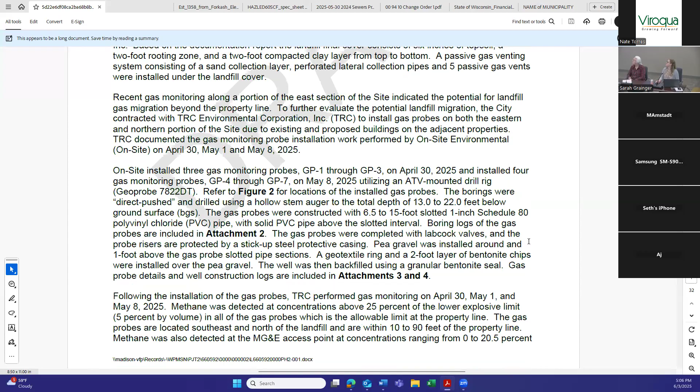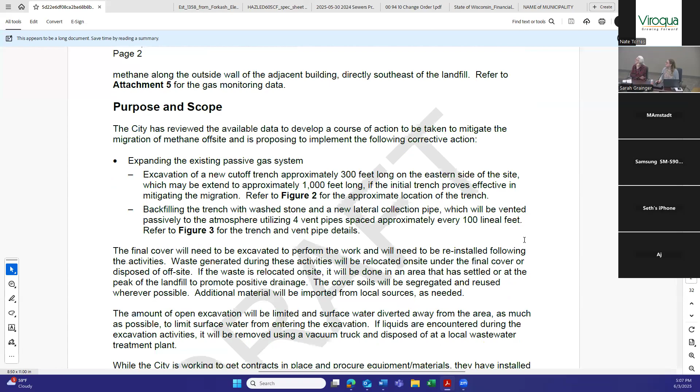If everything's acceptable to the DNR, implementation needs to be done by the 30th of June. So right now I have to work out with the DNR what they are calling implementation.

What this is calling for is: the landfill currently has a passive gas system which consists of pipes buried below the final cover. There's a final cover made of clay that impedes the flow of water into the landfill and impedes the flow of gases vertically out of the landfill. Underneath that final cover, there is a passive gas venting system that consists of pipes and trenches, and they connect to 5 existing goosenecks out there to vent to the atmosphere.

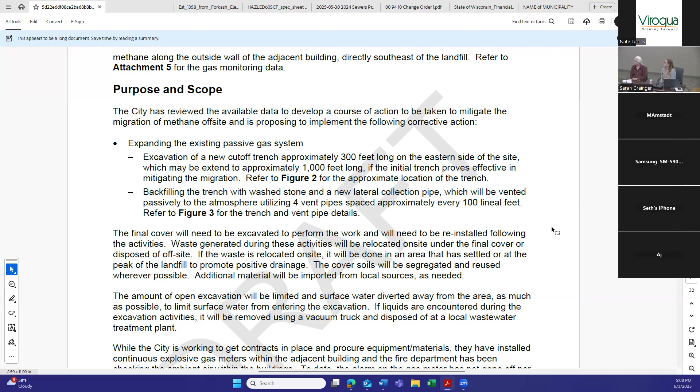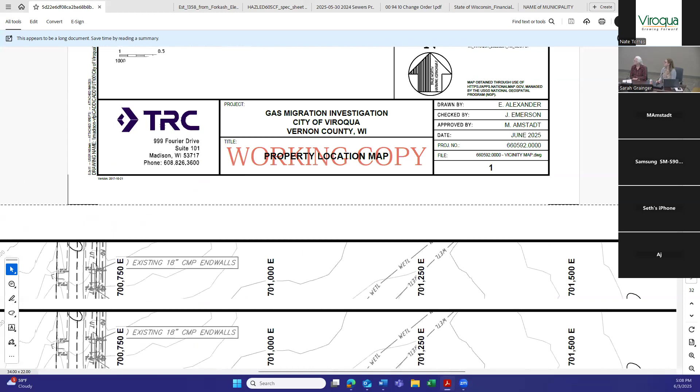That system may be working a little bit, somewhat, but it's not controlling the gas from getting off site. So what we are proposing to do is put in additional piping underneath the cover with additional goosenecks. The way I've got this written up is we will do approximately a 300-foot trench on the east side near the church building. That 300-foot trench will have an aggregate trench and a pipe connected to 4 goosenecks.

And we will monitor gas probes 1, 3, and 2 to see if the gas that we were seeing in those probes starts to go down or is eliminated completely. The goal is for those to be showing 20% oxygen and no methane—basically ambient air.

If that 300-foot section works, we will expand it to approximately the whole 1,000 feet, because we also have migration along the north at gas probes GP 4 through 7.

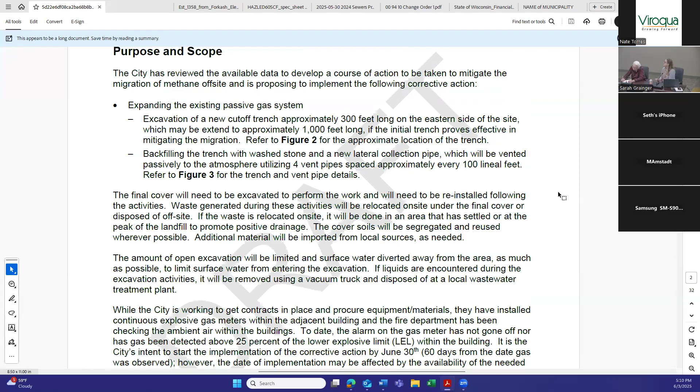So what we're proposing to the DNR is to put 300 feet of trench in and monitor gas probes 1, 2, and 3 weekly for up to a month, and then depending on those readings, construct the additional 700 feet.

I am not 100% sure that they're going to agree with this approach. They may want the whole 1,000 feet, but I don't want to construct 1,000 feet of something if it's not going to work. In my opinion, this is the best course of action for the city to take at this point in time.

We've looked at other possibilities, things like whirlybirds that you can get from Menards or Home Depot that you put on the existing gas vents out there—something you might see on top of a roof line that would just pull a little more vacuum out of the 5 existing vents, but that's not going to be enough.

We looked at installing small blowers on the existing gas vents. That is not going to pull enough vacuum. You could put an active blower, like a vacuum cleaner, but it needs to be intrinsically safe, so it's not just your typical vacuum cleaner or shop vac that we could retrofit to work.

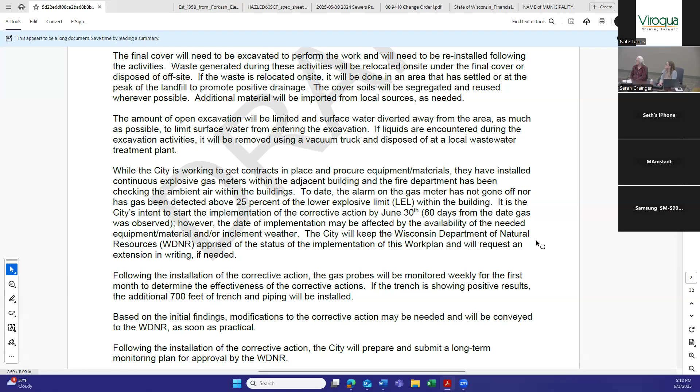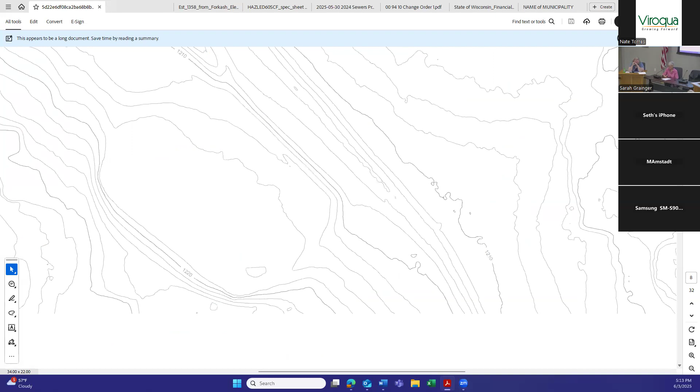Seth, it's hard for you to visualize it, I imagine. Well, I was visualizing, but I appreciate the explanation of it, Mike. I like the idea of basically a test trench first.

Yeah, I think it makes a lot of sense, even just from a construction perspective, to know that what we're expecting to see, how we're expecting to do it, is actually what's happening out there, because there's still a lot of variables.

We talked with Badger, who's working locally, about if they do the 300 feet and have to come back in a couple of weeks, how much the mobe, demobe would cost. They threw out a number of about $500 per piece of equipment. So if it's a backhoe, a dozer, a dump truck, maybe $1,500 on a project that's going to cost hundreds of thousands of dollars if we do the whole 1,000 feet.

And if we do the whole 1,000 feet and spend hundreds of thousands of dollars and it doesn't work, that's not the time to find out. I'd rather find out by doing about 300 feet first.

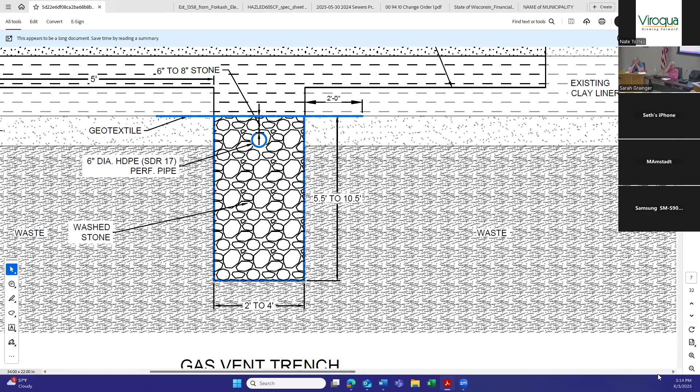How deep's it got to be? We asked for two different quotes, one for going about 10 feet deep. The final cover is 5 feet, using round numbers, so going 5 feet into the waste. And then the second option I asked for is going 10 feet into the waste. So we did get costs, and on here it says 5.5 to 10.5.

We got costs, and they're revising their numbers because their initial numbers were based off of hypotheticals, this is what we're going to do, and so on. They had to put their numbers together very quickly, and now they're sharpening their pencil, now that they have pictures in front of them and can see what we're proposing to do.

Who's 'they' that's sharpening their pencils? Badger, okay. I'm not sure if it's Badger Construction or Badger Excavating. Actually, Badger Environmental. Okay, Badger Environmental.

Yeah, this is sort of the result of the process, right? We moved into it really quickly because we wanted to get a handle on what we were talking about. It's hard when a contractor gets something somewhat vague and they don't know all the parts, which again was because TRC was moving so quickly, trying to get numbers before they had the image and the drawings to send them. Then we had a conversation about the things that were more challenging for Badger, like how they would go about the excavation and move the trench boxes. I think it was a really good meeting to help everybody get on the same page and figure out how to do it most effectively.

So to answer the original question, how deep are we going? Until we start digging, I am not sure how deep. We're going to try and go as shallow as possible.

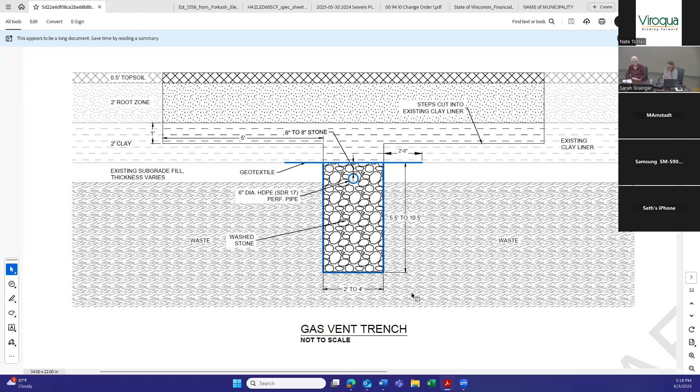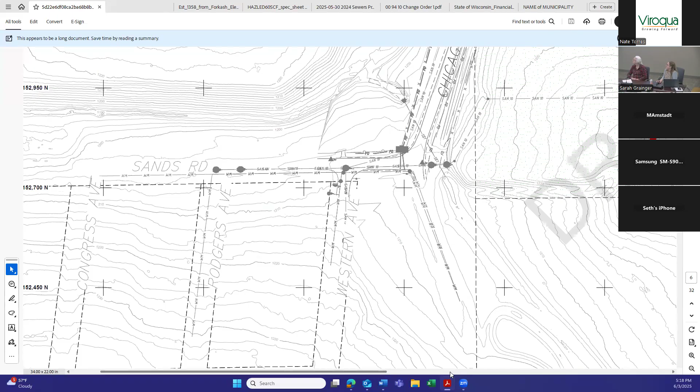Sarah, if you go to where the red line is showing the trench, you can scoot it over. So right next to that, there's kind of a bullseye, and right in the middle of that bullseye there is a passive vent that should be allowing this gas to get out, and for some reason it's just not doing its job.

I did not show it on here, and I did not mention it in the work plan that we were going to try and tie into that or investigate over there, because I didn't want the city to be committed to any more than it has to be.

But going to that passive vent that is there, which will be another maybe 30 feet to dig down in that area, we'll try and find out why the existing system possibly isn't working. It could be as simple as it being bedded in a very dirty sand, which was common back in the day, because when the rules came out they just said you had to put it in sand. So a lot of people used a silty sand that's dirty and doesn't really allow much movement of air through it. It's not porous, whereas our trench should be very porous.

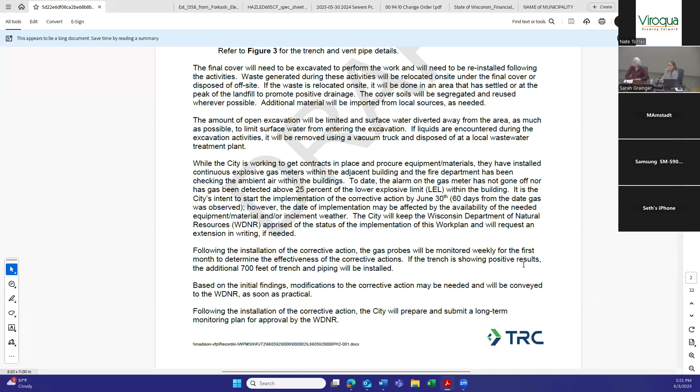The DNR may not be interested in us doing it phased. So you're going to try that? We're proposing it. We have brought it up to them, but the area we're looking at doing is this area, right here, because this is the church.

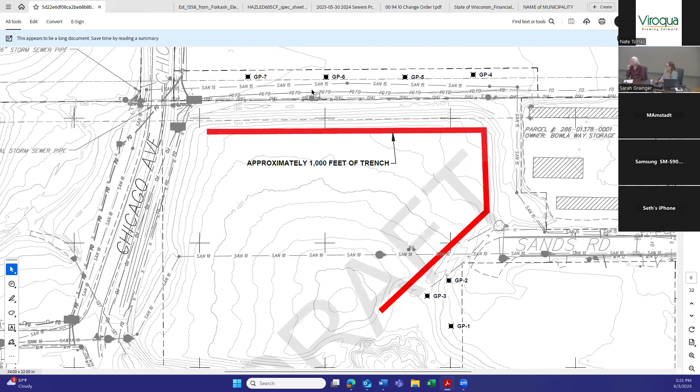So the north side we did because we know there's going to be development, but there's nobody living here, there's no buildings right there, it's quite far away to other buildings. But this area is a more active area, and so this would be our primary location to remedy first. It's accessible and it just seems like a real good place to start.

So that's the idea, that if they'll allow us to just do a section of it, see that it's successful or whatever we find out. Again, we're learning things constantly, and opening it up and digging in will tell us more about what's happening specifically there, but hopefully we can get a better understanding of the landfill.

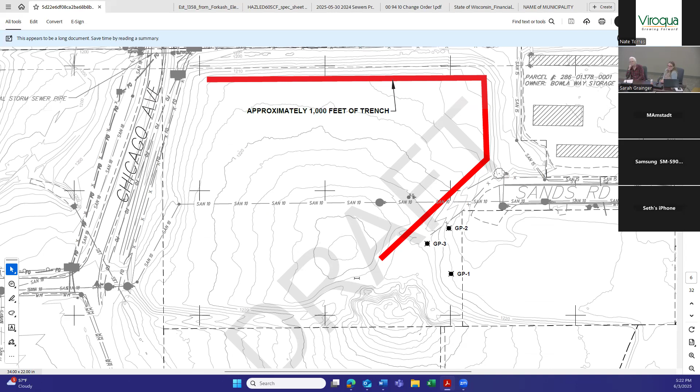AJ: If we go with this plan and the deadline being Friday for the DNR, and they say we can't do 300 feet, do we just default to doing the 1,000, or how do we handle that? Well, I guess we'll have to react to whatever they throw at us.

And then this is the work plan, and the idea was that we would take the proposal, like the proposed contract, and take that to council and get it approved. So there's going to be another step regardless after we go through this. But I guess it kind of depends on what they tell us, which I'm assuming is do all of it, but we don't know that. The one thing is, the DNR may say, do it all.

Once we start digging, we may find something we weren't expecting that changes everything I'm proposing right now. That could end up being a phone call to Colin Maas at the DNR saying, things aren't like we thought, what we were proposing isn't going to work, and I'll send an addendum. So I'm trying to keep it as generic as possible, allowing us to put a backhoe or excavator into the ground and see what we have.

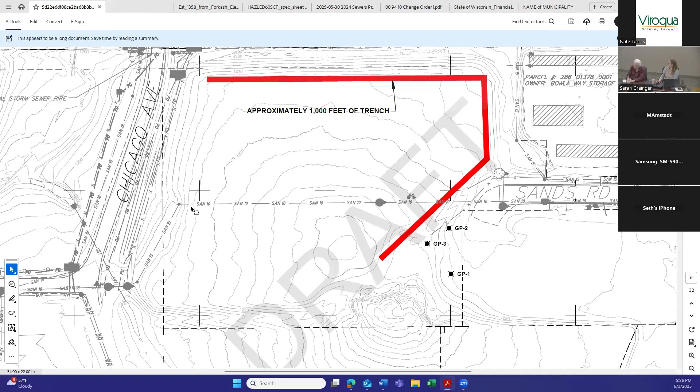We're looking for a motion. I make a motion to approve the landfill gas remediation work plan as presented. This is Crystal, I'll second. Motion and a second — any further discussion? Do we need any more explanation than that, Lori? This is not money at this time. Roll call — all in favor signify by saying aye. Aye, aye, aye. There's nobody else left, so motion carries.

Thank you, Mike. Okay, Sarah, I'm going to drop off, but if you need me I've got my phone right next to me and can get back on. Thank you, Mike, I appreciate that. Or do you just want me to have you guys on in the background? I can do that too. No, we should be done. Okay. Thank you, everybody have a great day. You too, Mike, thank you.

Thanks, Mike. Okay, approval of the Forkash Electric proposal for lighting at the wastewater treatment facility.

This is the second proposal we've seen from Forkash — we're keeping them busy in the lighting section. Can we say why we need to do this?

Explosion-proof light fixtures — this is for the wastewater treatment plant, in our treatment domes. They're covered and let in a little bit of light, but obviously we need light all day and night when we need it. The ones we have right now, four in total, are not working anymore, and you can't just put a new light bulb in because they're explosion-proof fixtures. So this proposal is for installation and supply of four of the fixtures.

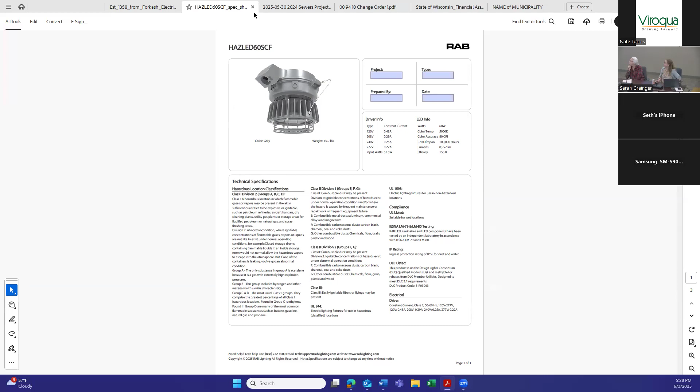And they look like this right here. They'll basically install them in the domes to make sure we have proper lighting that's up to code. Do they have cameras on them, or does it just look that way? I think that's just the way it's attached to a pole, that kind of thing.

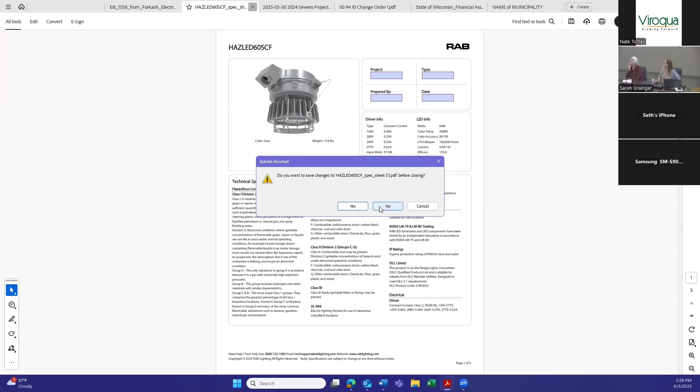So I'm looking for approval to install those lights. We're doing explosion-proof ones because we have to, I assume. Yeah, or we just like to spend money.

It's corrosive, and potentially, at the wastewater plant there are different classifications of explosion proofing depending on the room. The primary buildings are probably the most concerning, but any really closed building can build up gas when it's exposed. I don't know if everybody came to the tour way back when, we should do one again soon, but it's that covered dome where you have all the open process basins.

Okay, looking for a motion to approve. This is AJ, I make a motion to approve the Forkash Electric proposal for lighting at the wastewater treatment facility for $3,772. Okay, motion by AJ.

Do we have a second? Todd will second it. Second by Todd. Any further discussion? Roll call, please.

Seth, aye. Todd, aye. Andrew, aye. Crystal, aye. And Cindy, aye. Motion carries. Discussion and approval of financial assistance agreement for lead service line grant.

Cheryl: Okay, so I didn't know how much you wanted, sorry Cheryl, but I have both of those documents in case you need them. Okay, I don't think so. It's a fairly simple financial agreement.

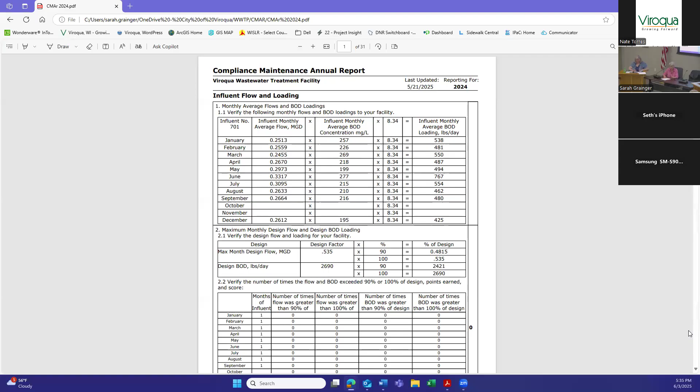Review and approval of the 2024 Compliance Maintenance Annual Report, CMAR, and the resolution. All right, it's everybody's favorite time of year.

I know, but you are on the hook for this. So it is important that even once a year you see what you have to be responsible for. I'll go in more detail today as necessary, but I'll try to abbreviate it for council. Still, all council members are responsible to understand what's in this document.

Pardon? Well, that's what the resolution says, that you review and accept it, and I was literally told by the DNR that this is for the board. This is so the board knows what's going on and makes sure all of these things are understood. Is there a test? Yeah. Let's hope they don't ever get to that point. We're in trouble. Right, okay.

Can I ask, do you just get to plug in some numbers and the report fills itself out? You don't have to. It's mostly populated through our submissions throughout the year. Then there's stuff that we do fill out, but like all of this flow information, Brock doesn't have to put this in new, it just pops itself. I wonder if in the old days they had to do it. Oh, I'm sure they did. I don't know when CMAR started, but we've done them ever since I've been here.

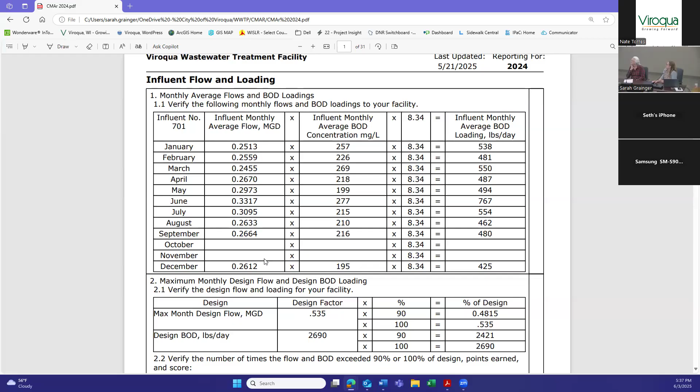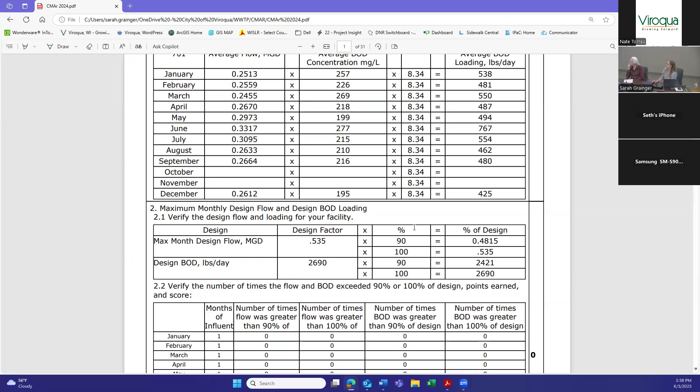So our flow rates that we're looking for, and it says, okay, this is our design factor. We're at 0.535, and this is at differing averages. We'll have our averages down here, but 90% flow and our 100% flow rate. So we're doing really well, we're not hitting too much flow coming into the system.

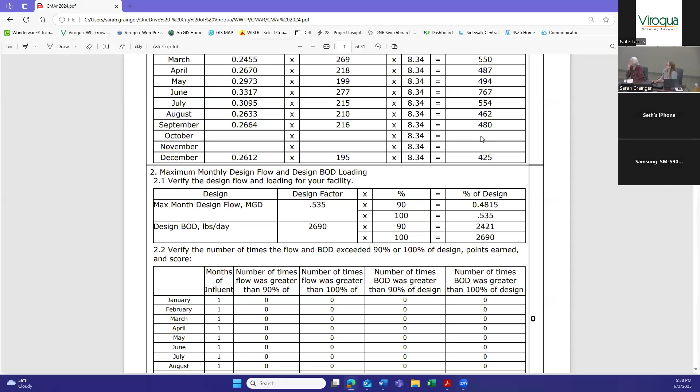And then the same thing for our BOD, our biochemical oxygen demand. It's our general parameter, it says can you handle how strong the waste is compared to everything that comes in. Again, we are doing well in both of those, we're not exceeding the amounts we're supposed to. We always do pretty well on our BOD loadings. Here, I think the maximum was like 767.

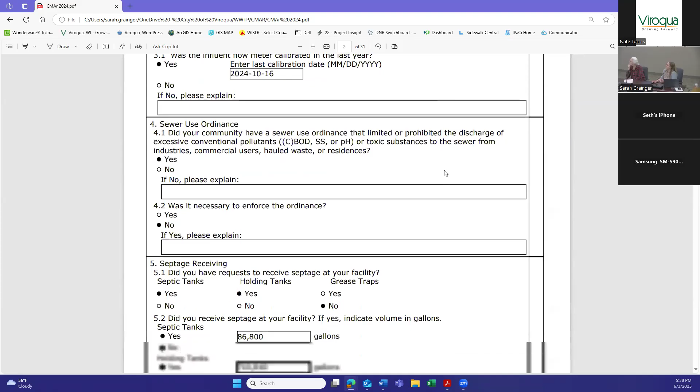Okay, flow meters. We talk about our influent flow meters and when they were calibrated. We have a sewer use ordinance that prohibits excessive pollutants in our system. Yep, we got all that taken care of.

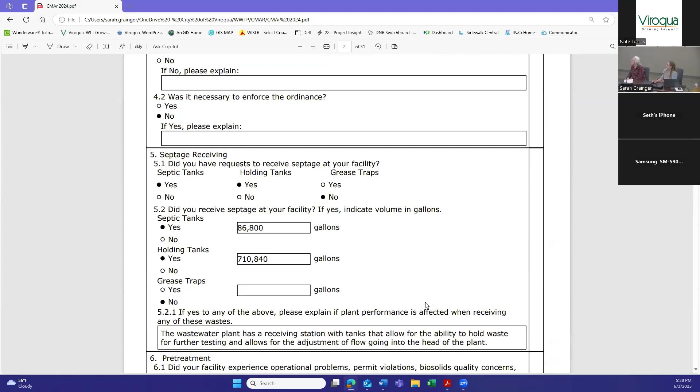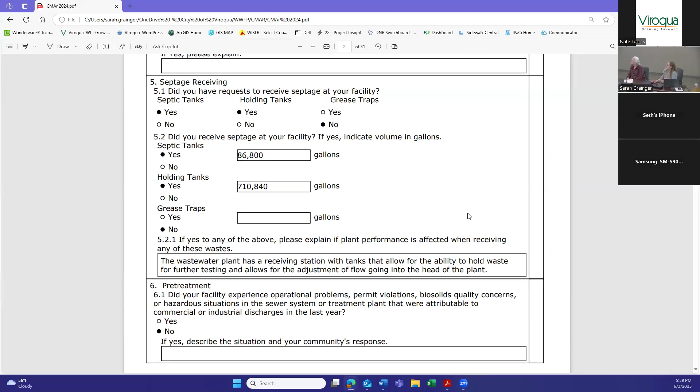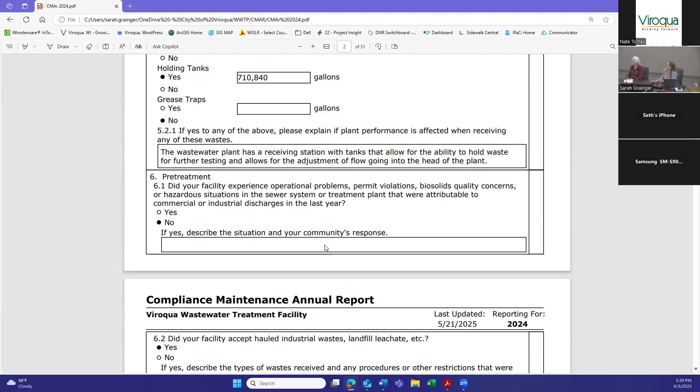Septage receiving, basically this is our hauled waste, so how much we get from septic tanks, how much from holding tanks, just slightly different forms. We set up that station essentially to bring the waste in and be able to hold it and have a little more control. That's been really great to use. We don't have any facilities doing pre-treatment. We had 2 loads of leachate, and that was just because they were in a bad spot, which we always try to help them with when we can, but we don't like to do it all the time.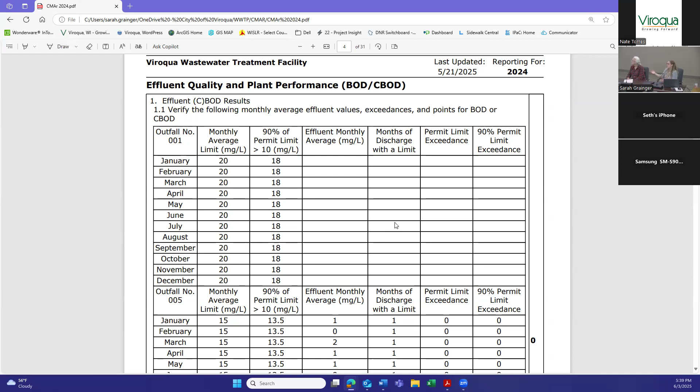And then our effluent, that's what's coming out of the plant. This is what we would be having our limits on, right? So it's like they don't really care what comes in, they care what comes out.

And so we always have two sets of information, which is always confusing because we have two outfalls. We have the outfall that's at the wastewater plant, that was the original outfall, but then we also put the outfall in down by Springville. And so this is why we have two, but we don't have any data for one because that meant we weren't exceeding capacity or having some sort of upset that we needed to use the second backup outfall.

And so we ended up with our different averages for all our parameters. This one here is our BOD results. So again, that's kind of like your general organic matter biodegradation, meaning hitting limits. And that obviously would affect the water quality in the stream.

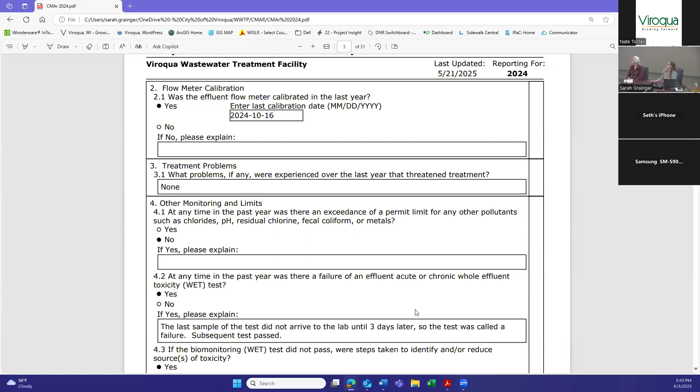Talk about our calibration again. What kinds of exceedances did we have for things like chlorides, pH, that kind of thing? We did have a problem with one of our WET tests, which is our toxicity test, but it was because it didn't show up to the lab on time. So they can only use it within a certain time frame. The subsequent tests passed.

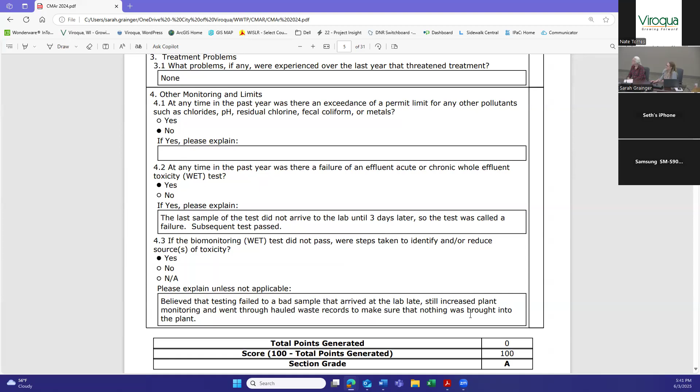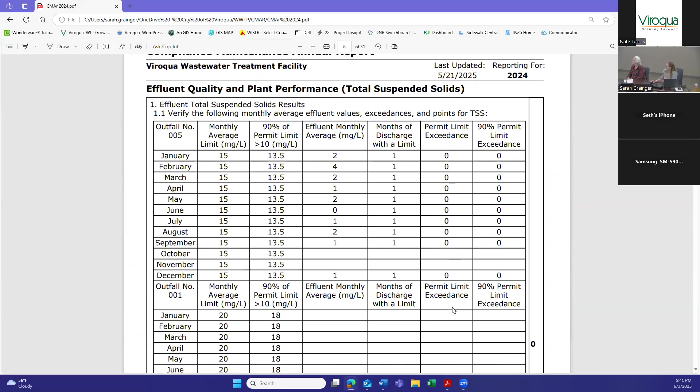And again, we talk about that. We went through to make sure that we didn't have anything odd happening at the time. So that one went okay as well. Then there's the solids, the amount of solid material that comes out in the effluent, we have limits there as well. And so we're doing well and didn't have any exceedances in that category.

And so they give us a grade. So 100 points is good, or excuse me, 0 points is good. It's backwards. So 0 out of 100 gives us an A.

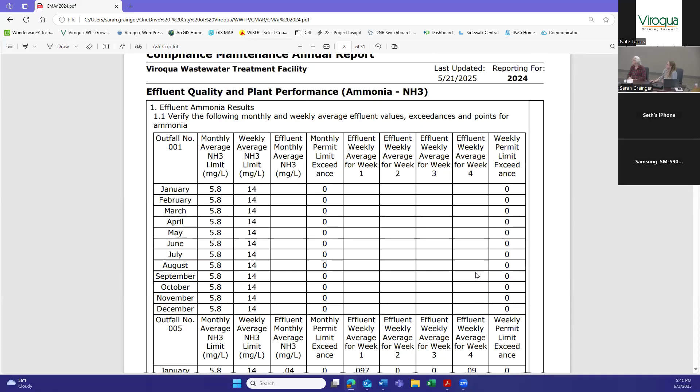Ammonia is one of the parameters that we've just started testing in the last number of years. So we have the monthly average, which is kind of confusing because there's a monthly average and a weekly average, but we have to pass all of those averages. And again, we had no exceedances.

This one is the one that gives me nightmares. We're doing well, but it's the one that I can't control very easily, meaning it's not something we can just add alum to or whatnot. You really have to have the microbes doing the things you want them to, and it doesn't turn around very quickly.

Let's see, so again, all doing really well. You can thank your wastewater treatment plant operator for that. Yeah, I was going to ask you, what are the parameters that Brock always gives you at utility meetings? Yeah, he always tells me about this one, phosphorus and ammonia. Those are the big ones he's always checking in on.

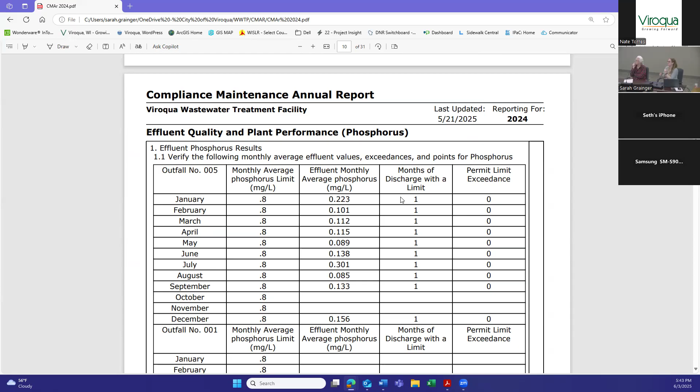It's a rare occasion we have anything with BOD or solids, the limits are pretty high. It happens occasionally, like if we use clarifiers and sometimes a chunk comes out. And so if we get that in our sampler, because our sampler is taking samples like 24 times a day, I think it is - that may not be right - if it picks something up, then it can change our reading.

Phosphorus is probably one of the major reasons most wastewater treatment plants have done upgrades in the recent past, because limits went from like 1 or above to, this one says 0.8, and the only reason we have 0.8 is because we have our water quality trading involved with that. But our limit, we're trying to hit much lower than that, 0.4. So again, we're doing really well there.

Biosolids - so we got what goes out as liquid, but then we take stuff out too, right? That's our biosolids, and we land apply our biosolids. We have 46 acres that are licensed for land application, which is more than enough. And we always make a real point of not applying the full limit that they give us.

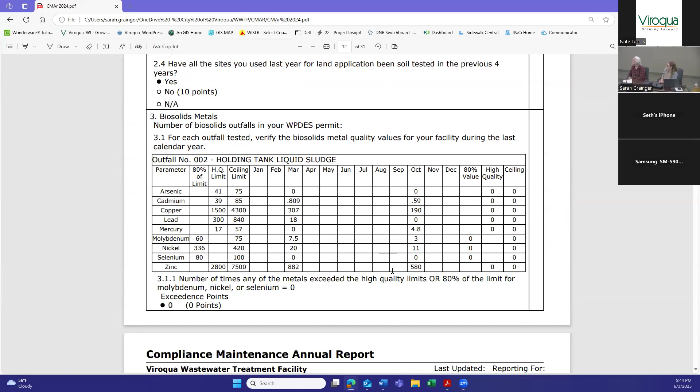So they'll take soil samples and they'll take our samples, and then they'll tell us how much we can apply. And so we always do about half of what is required. One, we don't want to overdo it on the soil so we can continue to use the same farm fields. And we are required in sludge to test for heavy metals and things like that, which we're not having any exceedances in. This is kind of just saying you haven't had any problems with metals in the past or accumulation of it.

And pathogen, so the idea is that we're breaking down the potential pathogens because we're land applying it.

And then the other part about land application, besides pathogen control, is vector attraction, meaning we don't want the animals to go crazy over the fact that we had just applied it. So we do incorporate it or inject it into the land when we apply it.

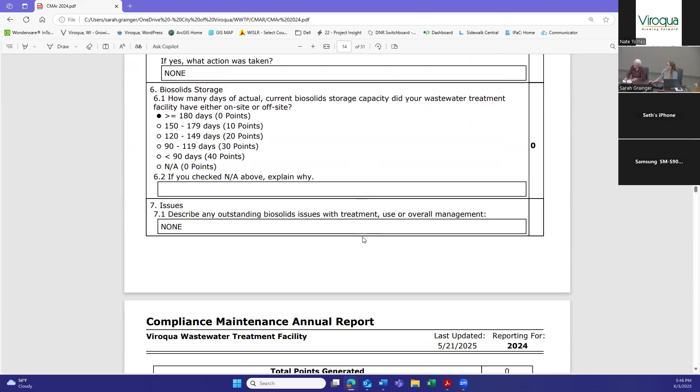And we have 180 days storage - this is what the aim is, or greater. We aren't, for example, doing sludge application. We usually would do it in the spring and the fall, and we're not doing it this spring, or didn't do it this spring, because we didn't need to and wanted to try to save, because it's not cheap. Not cheap at all, which is a whole other conversation for another time about a different approach, but we won't get into it today.

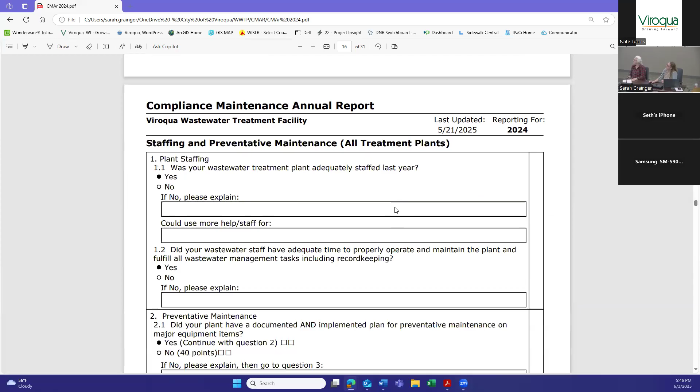Our staffing - so was our plant adequately staffed? Yes. And do they have enough time to do all their management of it and maintenance? Yes. Would they say that? Actually Brock answered this section, so I don't hear him clearly complaining that way. Sometimes I might question him, but he feels like he's got it under control, which he does.

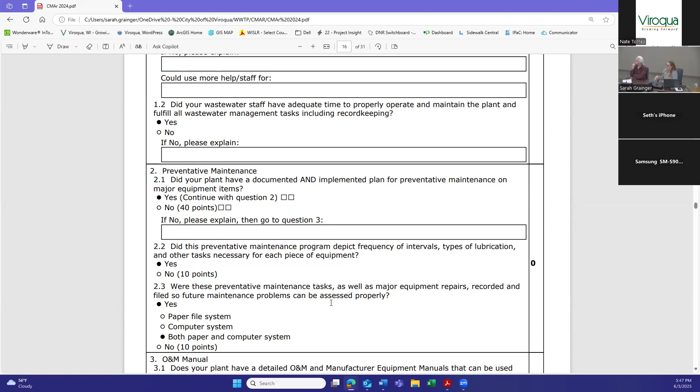So all our major equipment is in a Hach WIMS system, which basically tells him what needs to be maintained when, and what kinds of things need to happen, like oil needs to be changed or filter needs to be changed. And there are some records that we also have in paper. That's essentially what it is.

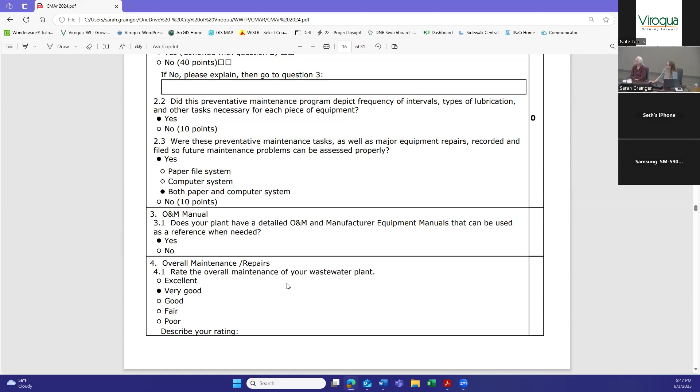Again, these are pretty straightforward. I was interested that he picked 'very good' as opposed to 'excellent.' So self-reflection, I think, but I think that's probably an appropriate answer. So there you go, and again, we had no points generated in that section.

Yay, Brock's name was finally on it instead of somebody else helping them. So that's an achievement for him, an achievement for the city, because we hired him and he was not an operator. He's come through the city and learned - over the last, gosh, he's probably been here 8 years now - and obtained his license. So I would say that's a good success story for everyone.

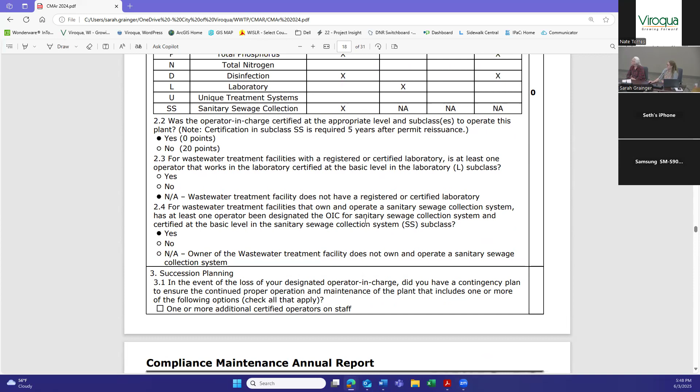And these are all the fancy things we need because of how complicated the plant is for operators. We have a backup, which is the operator who was the operator in charge previously. We also have one learning, an operator in training, but we're not allowed to count him unless he's within about 6 months to a year of being certified, and he's got like 5 years left to go. Yep, and he's got all the credits he needs - Brock does.

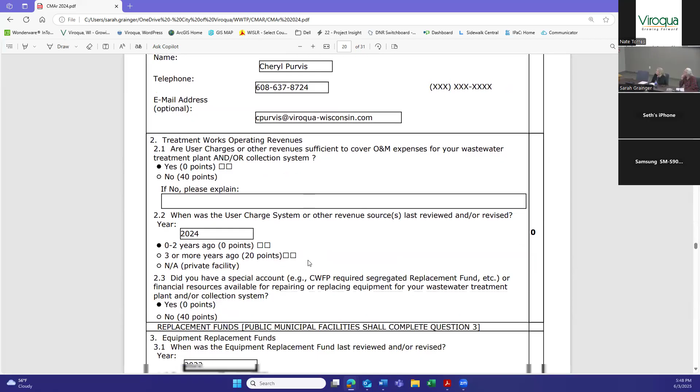And this section I can let Cheryl talk about. So the DNR likes to make sure that we are reviewing our rates enough to make sure the revenue is covering all of our expenses. We do that every year - I actually do that several times throughout the year.

We also need to make sure that we're reviewing our replacement account, which is the funds that we have to replace our major assets at the treatment plant. The last time we reviewed that was 2022, so Sarah and I do need to review that this year and update all the costs, which will update the amount of money that we need to have in our replacement account. Currently, we need to have $2.2 million.

After this year, we increased it to $138,176. Of that... 90,400 is a required payment according to our loan documents that we must put in every year.

Until we exceed the 2.2 million, or a revised amount that we may find this year. And we did 47,776 of that 138 in interest.

So I have put this into an aggressive investment account, the local government investment pool. Last year, the average interest was 5.22%. This year it has fallen into the fours, but we're still doing well on our interest. That'll just help us generate more money faster so we don't have to pay the $90,000 every year.

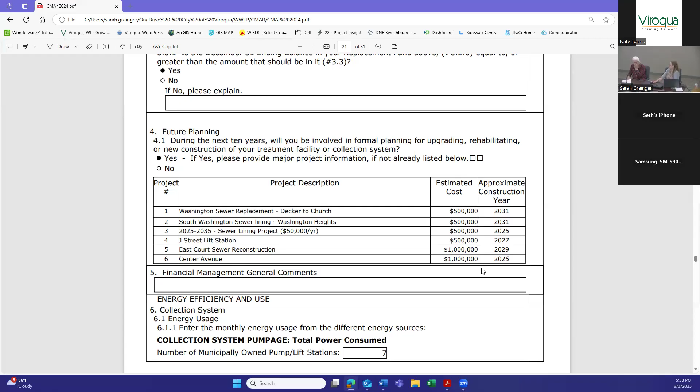It's a problem child, as you said, but it's also our workhorse. It takes more water than any of them, and it starts and stops more than any of them. So that's a bigger wear on the system.

In 2024, we had 7 lift stations, but we now have 6. That makes me happy, because in 2024 it's 7, but 2025 is going to be 6.

We're at least partially through, which is going to impact this energy consumption, right, for the plant and the lift stations. And this just talks about what have we done to ensure that everything's operating as efficiently as possible.

We did a lot of work in 2018 and '19 with a focus on energy, and not a lot's changed, so we haven't gone through the whole process again. They basically identified all the things, and a lot of it we did with the upgrades. That was a big thing in those upgrades, energy efficiency.

So the lift station you got rid of was the one by the fairground? Yeah. So you just reroute stuff? I mean, reroute, realign. Yeah, that was one of the big benefits of that project.

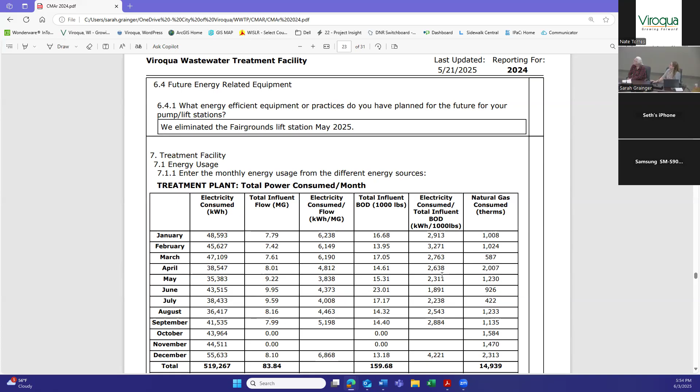And it just talks about power consumed. We use a lot of electricity. We use a decent amount of gas depending on the time of year. We use our gas that we produce into the heating of the digester, but we can't just use that alone.

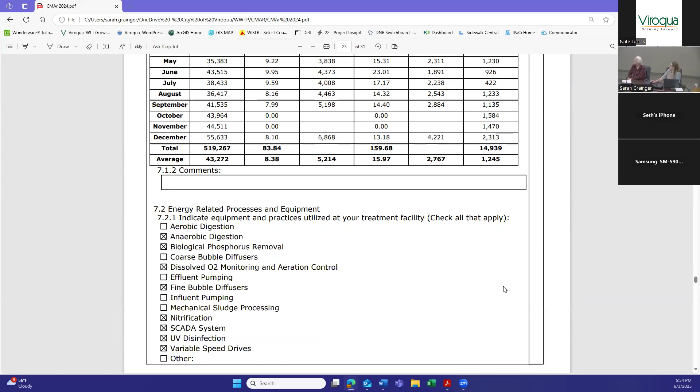And these are just kind of like, what kinds of things do you do? It has both kinds, it has aerobic, it lists it, but I don't have it checked. It just says anaerobic. So these are the kinds of things a person, an entity could do to improve the energy efficiency in the system. And so we have a lot of them. Sometimes some things we just don't need.

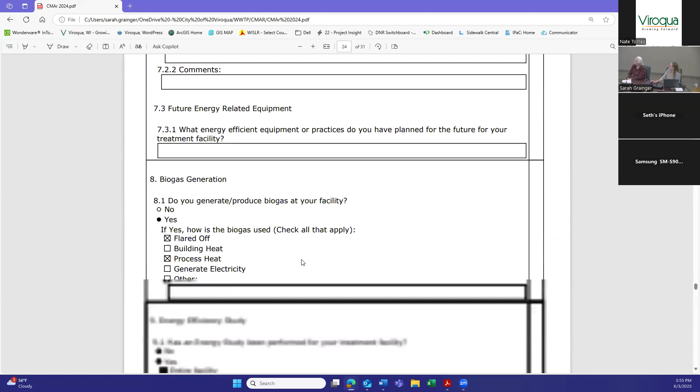And we talked about the biogas and the energy efficiency. We did both the wastewater plant and the lift stations. So again, doing well. So you don't have any plans for energy? I saw like solar panels or something.

We've had that there. There was a past question about that. In the past we've had, there's not a specific question about it, but I have in the past put it in there that we want to be looking into it. Somewhere it had, are you planning anything to reduce energy? Something was in there about energy efficient equipment and practices - what do you have planned for the future? Yeah, I'm just curious.

I mean, there's not a lot there that hasn't been done already. Like we did a lot of it - when you go there, Focus on Energy has a guide and you walk through the guide for every process. If you have this process, you should have like a variable frequency drive, that kind of thing. And we really have pretty much everything tied in.

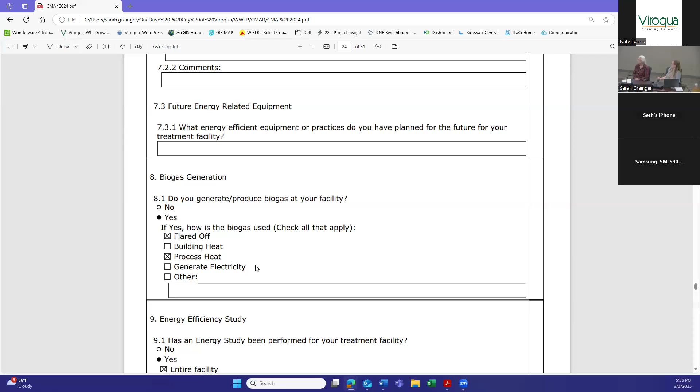The one thing I have put there in the past is looking at alternative energy, like solar energy. But I will say that when Ethos came through and worked with us, and E3 Coalition, they looked at all the places in town, and I just thought they were going to jump all over the wastewater plant, but they kind of didn't really see it as a great thing at the time because we didn't have a lot of extra space. That said, not that we couldn't look at it in the future, but I didn't put it in this time because it wasn't as exciting for those folks as I thought it would be.

Just curious. Thank you. Yeah. And it's a good thing to look at because obviously we spend a lot of money on energy.

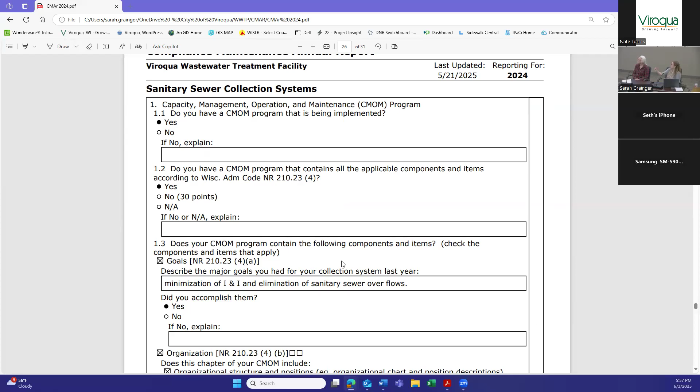And then we have to do our CMOM program. So we're constantly updating our CMOM, which is our capacity maintenance operation - capacity management, operation and maintenance. Basically it's just like how we run everything and who does what and the hierarchy, that kind of thing. And then it asks for things.

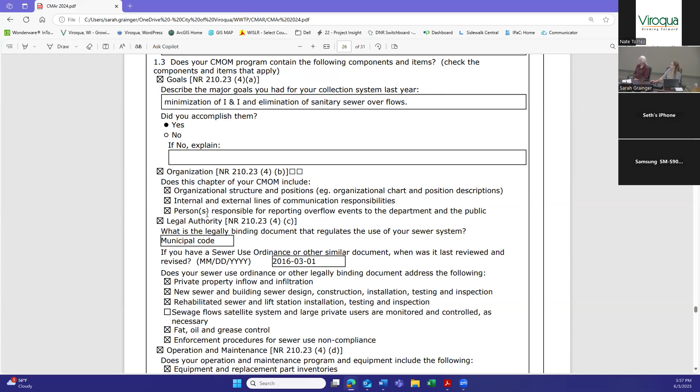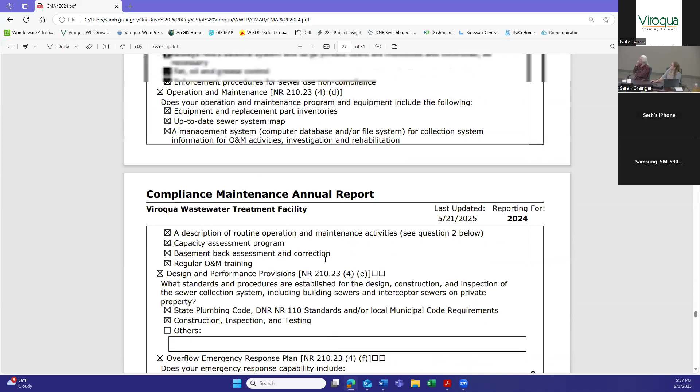The one thing I always bring up because I feel like it's something we're going to get asked about in the future - there's something in here about private property inflow and infiltration. It requires that people can't put clear water in the system intentionally, but it happens, right? I feel like there's a statistic, like 60% of potential inflow is probably more on the private side than the city side. It's not just ours specifically, it's generally true because the sewer mains are the city's, but the laterals that go from the house all the way into the main are entirely private.

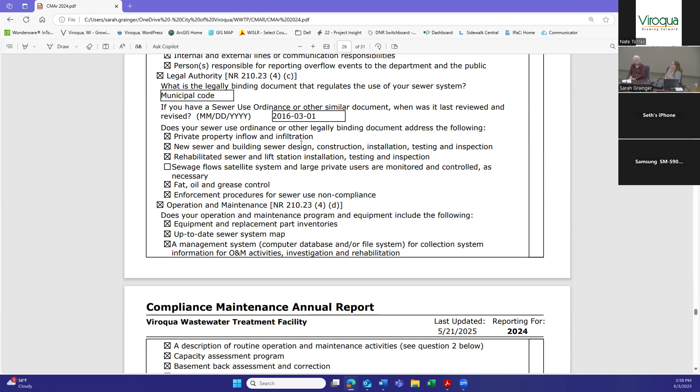So people have roots and other things that happen in their laterals, and they're just not - like we go through and televise our sewer mains, but that's not as likely happening in all cases. And so in some places, there's been stronger language about how to address that inflow and repair. In some cases, they've even done things like lining our sewer and then lining the laterals too. Just something to think about in the future. We've had our hands full, but it is something other communities do.

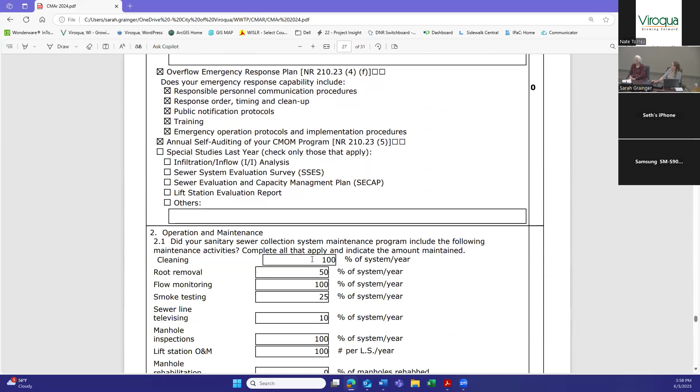This one I think is always good to see - this is our operation and maintenance. So our sewer cleaning, that's our jetting, root removal, flow monitoring, smoke testing. We've done a lot more smoke testing in the recent last couple of years. That was something that came out of our I&I study, to do smoke testing. Essentially, it's trying to find leaks - smoke will come up through vents connected.

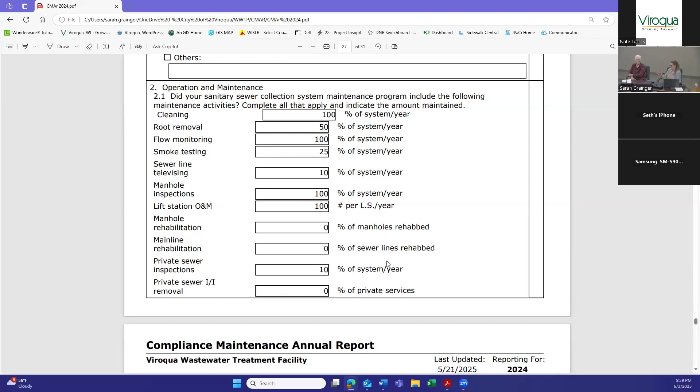What am I trying to say - downspouts. Televising, that's how much we've televised. We inspect the manholes and the lift stations. We haven't done manhole rehabilitation much. We were doing a lot of it for some time, but all of the brick style manholes have now either been relined with concrete or they've come out in projects. So we just haven't been worrying about doing it as much.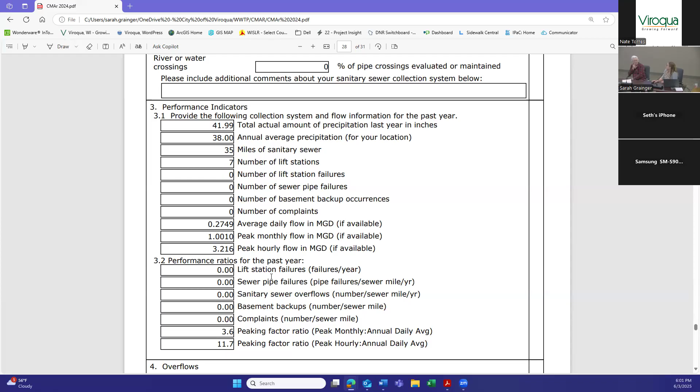But the meaning is that we're getting over 10 times the amount of flow in rain events that we do on an average day. It's a lot. Our peaking factor is 11.7. It's a big one, which is why we've been working and continually work on I&I.

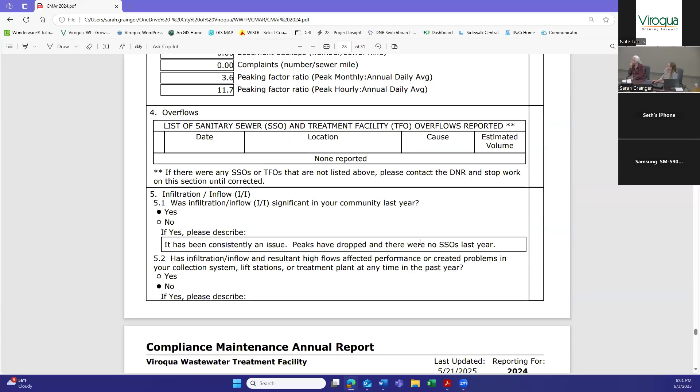We talk about what we're doing to address it. We worked with our I&I study, done, and that indicated where we should do further investigations, smoke testing, and just looking at stuff. So all in all, we did well in our grading system this year.

Then this is the ordinance that we put forward, which I think I also have in here, and then we can put comments or not put comments. If the governing body wants to put comments in here, we also can do that. Did I put it in? Oh, where is it? Oh, it's in the Word document.

So then assuming that you're okay with the CMAR, this would go to council stating that the Public Works Committee has reviewed the attached on the 3rd, and that the council approves the CMAR for the year. I would think the governing body would want to give you an A too. Awesome, thank you, I'll pass it on to everybody.

Anybody want to make a motion to approve this? This is Crystal, and I would move to approve the 2024 Compliance Maintenance Annual Report, CMAR, and the resolution. Motion made, I'll second. Second by AJ. Any further discussion?

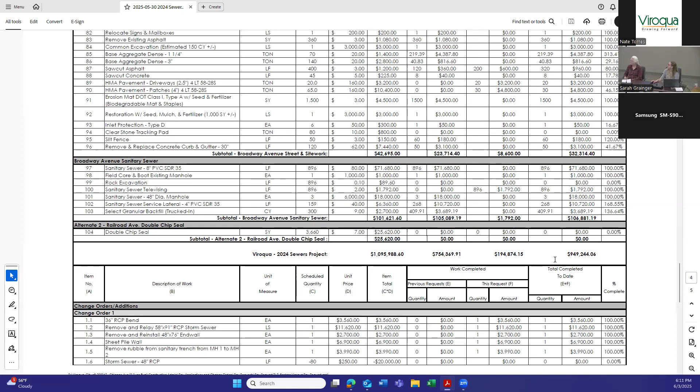Hey, Sarah, did we lose audio? I don't have my microphone on. Oh, I'm sorry. I thought it was on my end because all of a sudden it cut. Maybe I did have it on, it just disappeared. You should have heard her. All of a sudden I'm sitting here and my computer was being unresponsive, so I thought it was on my side, but then I got it working. Anyway, go ahead. Gosh darn it. Well, the short of it, hopefully you didn't miss too much—everything looks pretty darn good and what was expected.

This is Lori. All right, so we are looking for the current payment due, which is... the total is $223,587.65.

This is AJ. I make a motion to approve pay request number 6 for the 2024 sewer project, total of $223,587.65. Seconded by Crystal. Roll call: Crystal, Aye. Cindy, Aye. Seth, Aye. Todd, Aye. Andrew, Aye. Thank you for blowing that up on the screen so I could read it. Motion carries. Construction project updates.

I'm going to be really careful about that. Well, I guess we've sort of already talked about the sewer project. We basically need to do some restoration work and make everything pretty and secure and not eroding, but so far so good. It's the oddest feeling to be finishing two construction projects at the beginning of June, but that's because we're just going to have really weird construction seasons.